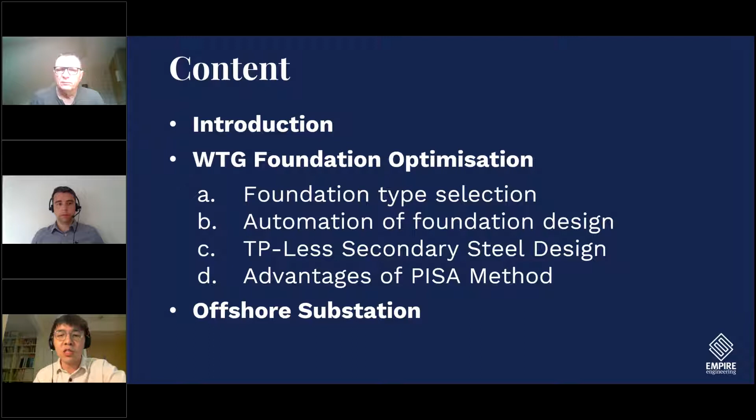And at the end of the presentation, we'll talk a little about our experience in offshore substation design. So a brief introduction of who Empire are and what we do - these are our values. As Empire, we are a niche engineering consultancy. Our values are trusted, because we've all been working on major offshore wind farms around the world and we're all experienced. We're specialists because we each have our own personal field of study, and we're all specialists in this industry. Last but not least, we're all responsive, we're happy to help, and we all love engineering.

What we do spans the entire project life cycle, from feasibility study, concept design, FEED design, to life extension, to commissioning of the offshore wind farm. For example, we do a lot of concept designs around the world to help bidders win the bid, such as the ScotWind leasing round and the UK Crown Estate round 4. We do concept design for them to give them a boost in their bidding round.

We also do a lot of FEED design to help developers get from concept design to detailed design. We also do life extension jobs, helping current operating offshore wind farms extend their structural life. These are the three main categories of our service: project delivery, concept and FEED design, and specialized work.

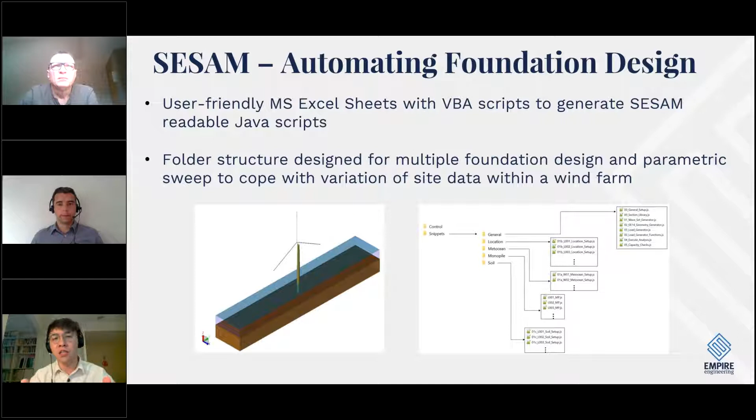We've also been using this in one of our studies, such as the Dogger Bank FEED study that we did only a couple of months ago. Now I'm passing the presentation to Andrew to talk about the Fathom automation part.

Thank you, Wei-Ting. Fathom is Empire Engineering's own in-house developed design analysis tool. It takes a set of input parameters regarding the wind farm site defined by the user, and generates the optimum foundation design from those input parameters.

Optimization is performed for the cost of the monopile, which can be based on our own internal cost database, drawing on our design knowledge and industry knowledge, or it can be a specific database tailored to the project.

Fathom allows Empire Engineering to deliver clients the most cost-effective design for their wind farm in a very short time frame. Currently Fathom designs monopiles, however we intend to expand this to jacket foundations as well, which will allow clients to compare which would be the most optimum design for their wind farm, whether that be a monopile or a jacket. Next slide, please, Wei-Ting.

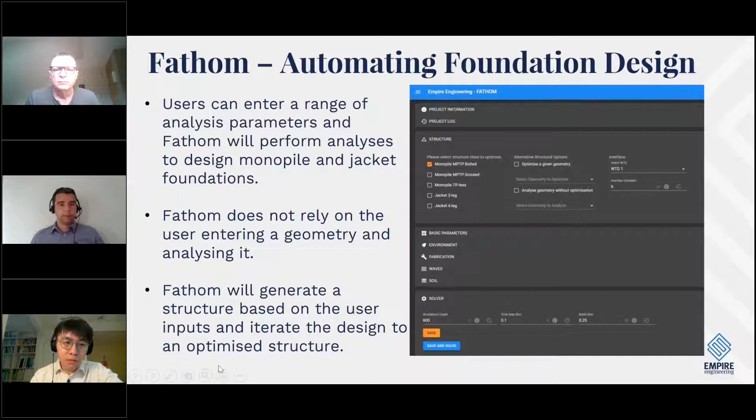Another aspect that we've been heavily involved in is the TP-less secondary steel design. It's a relatively new concept for the offshore wind market. It eliminates the traditional TP, and at Empire, we've really been involved in this from the concept stage right through to installation and commissioning.

The TP-less monopile reduces the operational cost of the wind farm, and studies we've undertaken show this could be a saving of between 6 and 10%, so it really is quite significant. The saving is mainly achieved by the elimination of a bolted flange from the traditional design, which is a costly offshore maintenance item that goes on for the life of the project, so eliminating it really is a benefit.

Savings can also be achieved during installation, as vessel owners can optimize their usage of their fleet, so different components can be installed by small and large vessels, which will compress the installation program. The reduction of operational costs is good during the lifetime of the project, but they will also make life extension more economically viable, potentially allowing you to extend the wind farm's life beyond the initial design life. So you can really squeeze all the usage out of your wind farm.

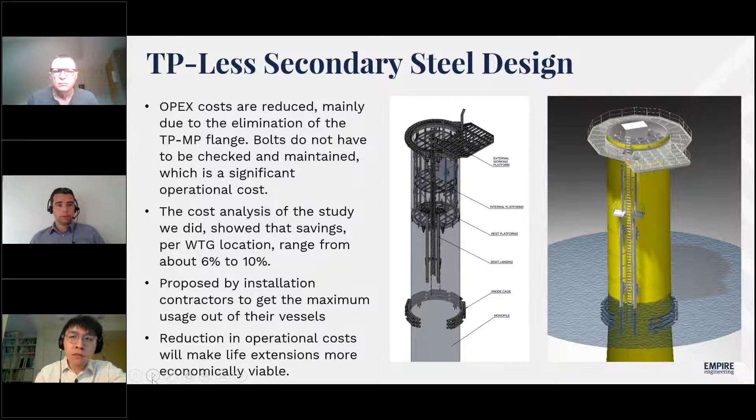At Empire, we've also been using the PISA method. The PISA method is a relatively new analysis method. The project was started in 2013, but it wasn't made available to the public until 2020. It aims to optimize monopile foundations by taking advantage of additional soil resistance, which wasn't captured in the traditional API methods. At Empire Engineering, we have delivered projects to clients, taking advantage of the optimizations PISA can bring.

These have really helped us reduce the cost of the monopile and reduce the embedment length, which can speed up installation as well. We have the experience in-house to design foundations using the PISA method, and this approach will be crucial in future to delivering optimized designs.

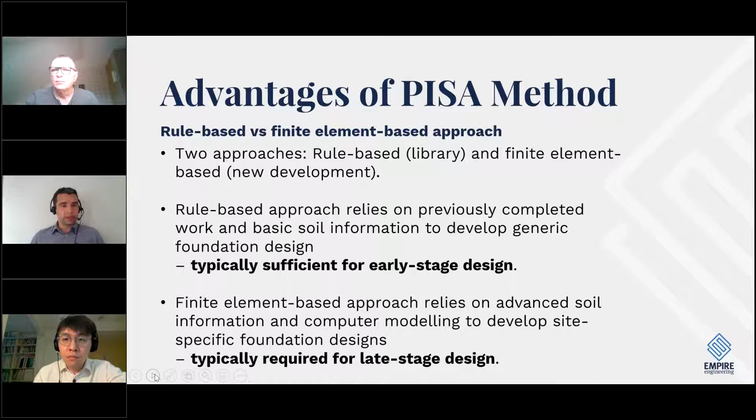At Empire Engineering, we not only deliver turbine foundations to clients, we have a wide breadth of experience designing offshore substations as well.

We conducted the full design of the structure, including the jacket and the topsides. We performed an optimization of the deck and all structural members to give the client the most feasibly optimized design. At Empire, although we've done a lot of concept designs, our team also bring a lot of experience from previous projects to Empire Engineering, so we do have a lot of experience in this area as well.

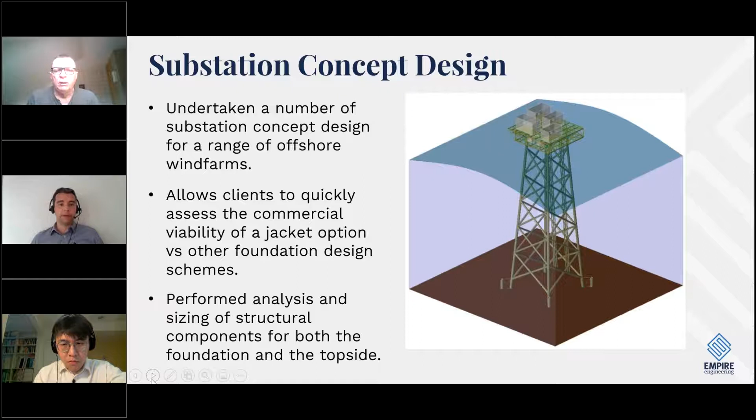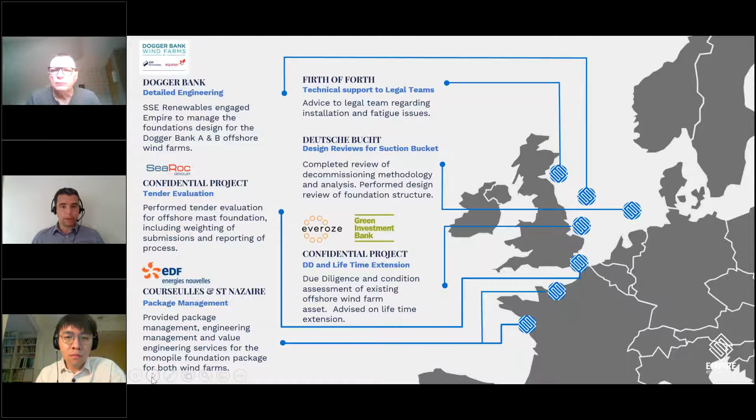So we've talked about our experience, but where have we actually worked? Let me give you a brief overview. Currently we are working on the Dogger Bank farm. Multiple members of the team are heavily involved in this, and we are working across all 3 Dogger Bank sites. We've also done work for various clients off the coast of France and also in Germany.

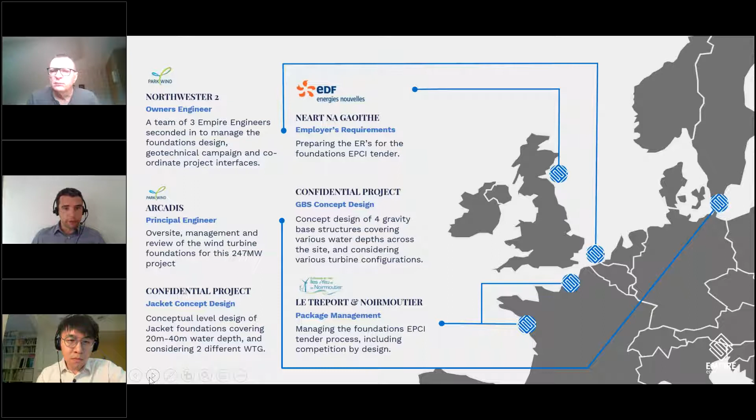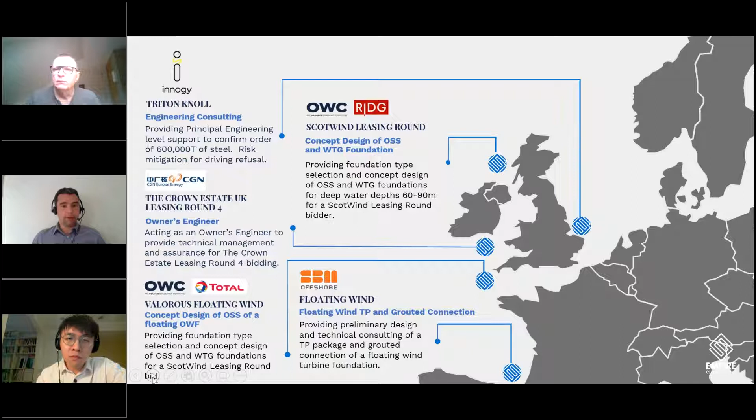The one to pick out here is that we've done the Crown Estate leasing round 4, which was right at the beginning of the project. We also have experience in floating wind - we were involved in a floating wind farm off the coast of France, just at the bottom there.

Our experience isn't only in Europe, we've also done quite a lot of work in the Eastern markets. We've done a couple of wind farm concept designs for Japan, Korea, and Taiwan as well.

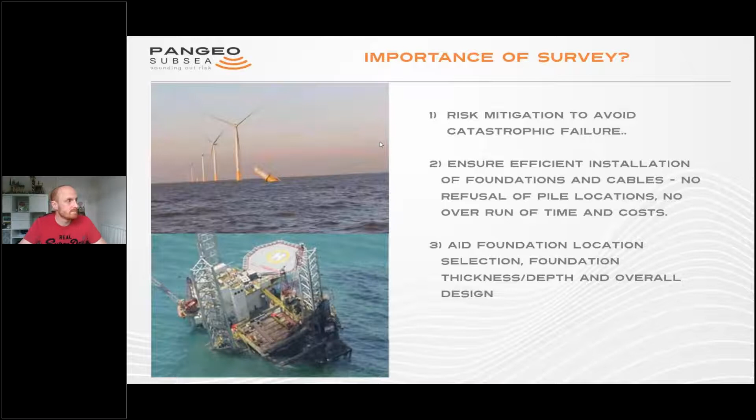Secondly, it helps in the overall design of those foundations - not only, for monopiles, the thickness of those walls in case you encounter buried boulders, but also what depth you need to target. I won't dwell on this, as there are people who know much more than me. Breaking the various foundation methods into two categories: fixed bottom structures, your jackets or monopiles, where survey design needs to account for the fact that they go much deeper into the seabed. Then the shallower foundations, typically your floating wind farms where it's an anchor - there your survey penetration only needs to be 5-10 meters, you'll have much higher resolution data, and you might be looking at a larger spatial survey.

Pangeo Subsea is a service delivery company. We specialize in subseabed 3D acoustic imaging technology, and we've developed two technologies to support offshore wind farm development.

The first one is the acoustic corer, shown at the top. Both technologies acquire 3D volumes below the seabed in high resolution. The acoustic corer is a tripod-mounted system placed onto the seabed, acquiring a 12-meter wide footprint.

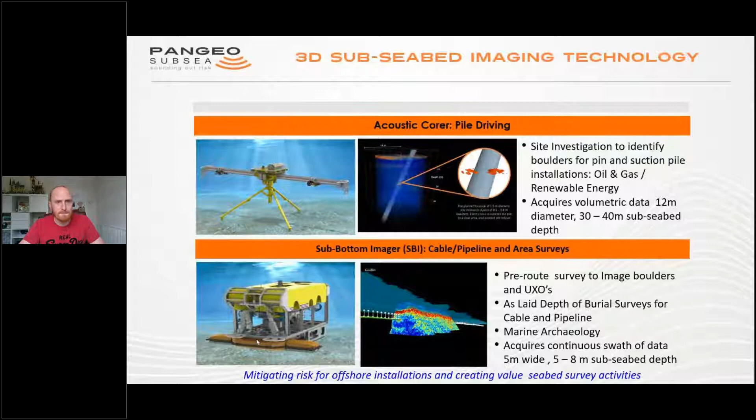Just a bit more about the sub-bottom imager, the first technology I'll run through with you. It produces a continuous high-resolution 3D acoustic volume below the seabed. It is a true 3D volume, although here I've got a few 2D slices to show you, looking into the volume.

Clearly this is a cable survey. We're going along the track here; this is your seabed, and that's where your cable is. This is what we call the plan view — we've sliced through the seabed to find the top of the cable.

It's exactly the same when you're looking for boulders or lithological boundaries — you slice through the dataset looking at these three different views. Then there's the side-on profile: here's the seabed, and this is the cable you can see, so you're looking side-on there.

Sub-seabed resolution is to 5 centimeters, 5-ish meters depth, up to 6-7 meters in some locations. What it's mapping is the acoustic impedance — when you go from sand to clay, there's an impedance at that boundary. It's exactly the same if you're hitting a buried cable or a buried boulder; it's the difference in impedance that it's detecting.

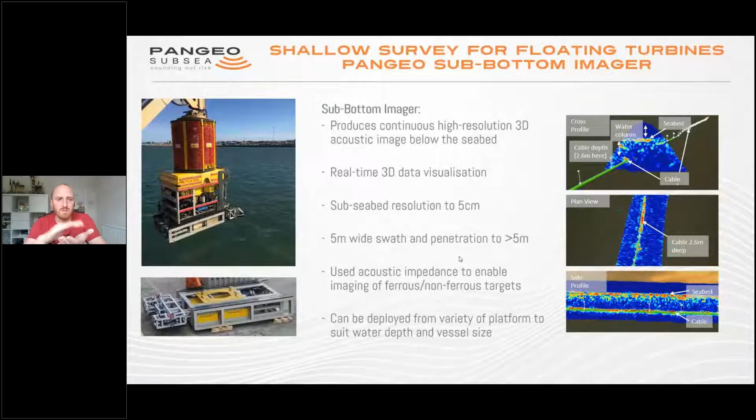Just quickly looking at the survey methodology, depending on the foundation design — here we're looking at shallow penetration of only 5-6 meters, for anchored foundations in this instance.

For these, you'd employ two different survey methodologies. One is if you already know those anchor locations and you're relatively certain you want the 3 or 4 anchors located in these spots — then it's a very small, targeted survey.

Typically the surveys we've carried out to date, targeting those locations, are about a 20 by 20 meter box, or a 20 meter diameter circle.

There you would acquire a 3-meter line space with the sub-bottom imager across the entire survey location, with obviously diminishing lengths of survey lines.

Here, the most efficient method of acquisition is from a work-class ROV, shown here with the sub-bottom imager in its ROV skid. There we build up a 200% overlap of the subsea data to ultimately enable detection of any buried anomalies and lithological boundaries.

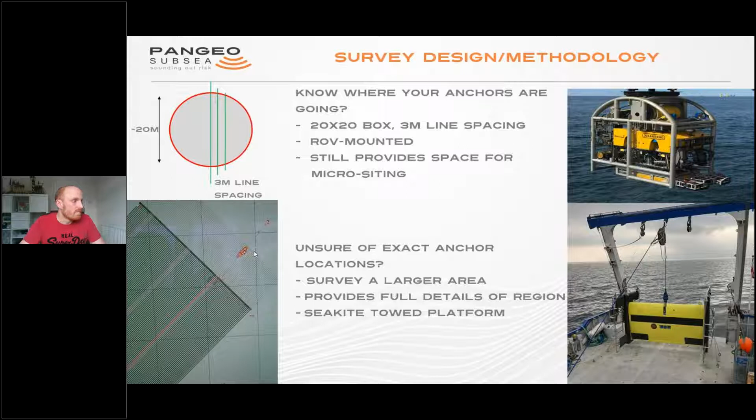So you're still delivering that 3D volume and able to locate all those anomalies and lithological boundaries, but in this instance you're acquiring over a larger area to enable more targeted foundation selection criteria.

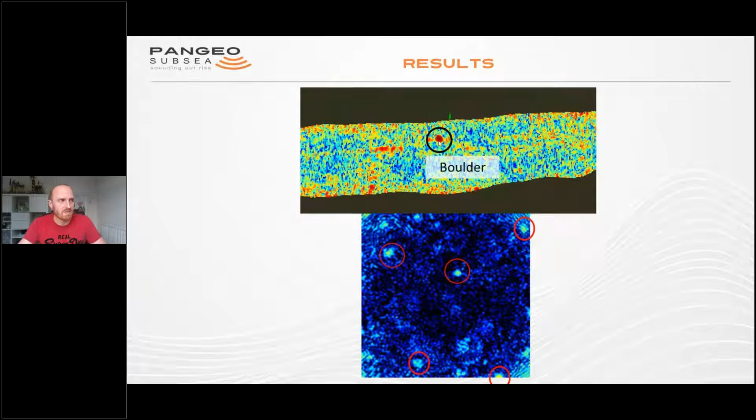The results from that survey, looking at individual survey lines now. These are top down, sliced into the seabed. As you're slicing through, you can see on the individual survey lines here until we locate the boulders. Here aren't numerous boulders on this line, thankfully only one. Ultimately, we're mapping its XYZ position so you know exactly where that boulder is, and getting very high resolution dimensions at 5 centimeter resolution. That's the technology.

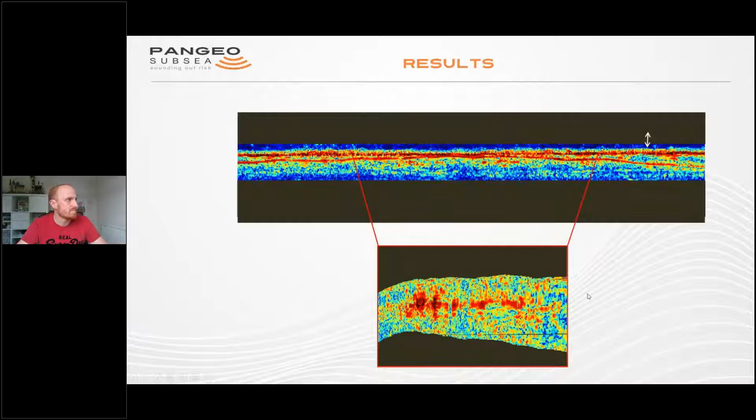When you start to stitch those survey lines together - till now we've only looked at individual survey lines, that 5 meter footprint - now when we start to overlap those survey lines and look at the broader picture of your 20 by 20 meter box or your entire survey area, you then get to start to build up a very clear picture of exactly what's going on below the seabed at your foundation site.

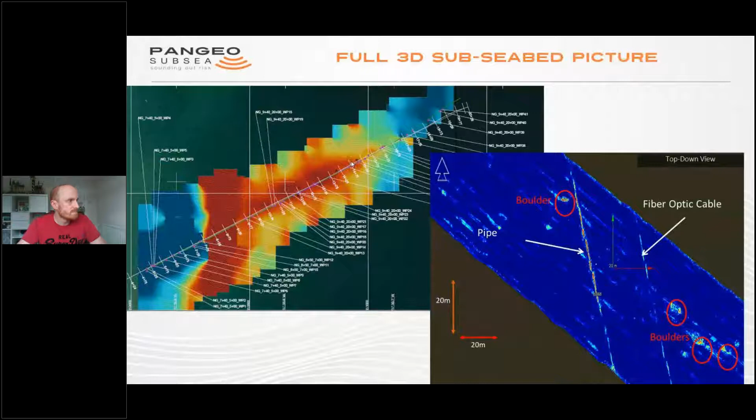Secondly, introducing you to our acoustic corer. This is used for your deeper foundations, so your monopile or jacket pin pile locations, when you need to acquire this high resolution data but to much greater depth. The acoustic corer produces a 12 meter wide diameter cube of data that penetrates anywhere from 30, 40 to about 60 meters into the seabed. We've done numerous projects within the Baltic, including one in the Polish Baltic where we achieved upwards of 60 meters penetration.

It houses two payloads, two acoustic payloads - a low and a high frequency. The sub-bottom imager is all high frequency. The acoustic corer now houses a high frequency, the exact same high frequency chirp projectors that the sub-bottom imager has, but also then has a lower frequency projector package to image much deeper into the seabed.

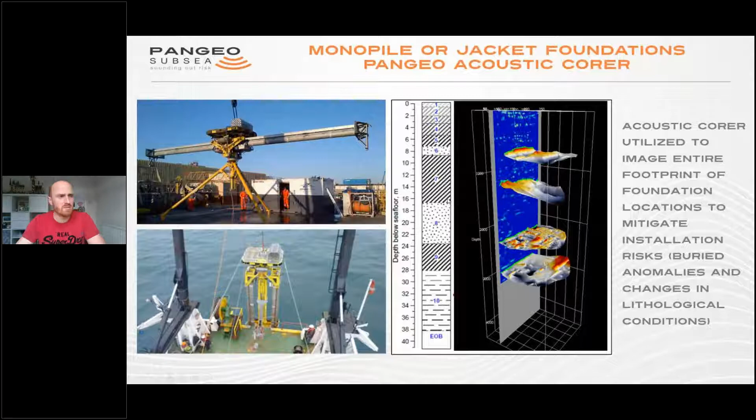Survey methodology is very simple or straightforward for a monopile. You've got a single location for that foundation. You would place the acoustic corer centered on the center of the pile location and acquire that data. If you locate any anomalies within that which you can't really pile through, the results are all given offshore within 24 hours, so you can start to daisy chain those to overlap until you find the suitable location.

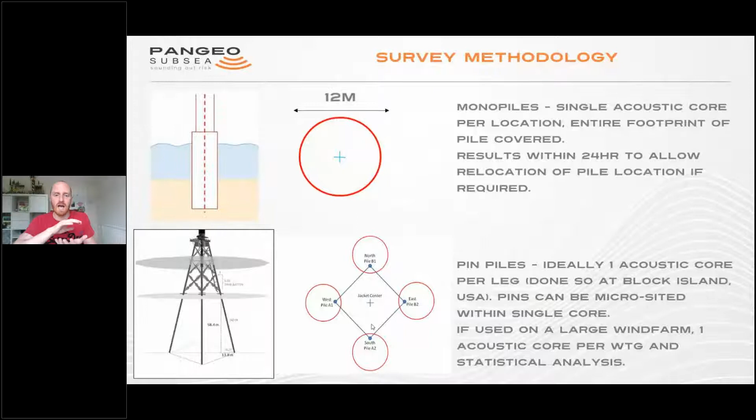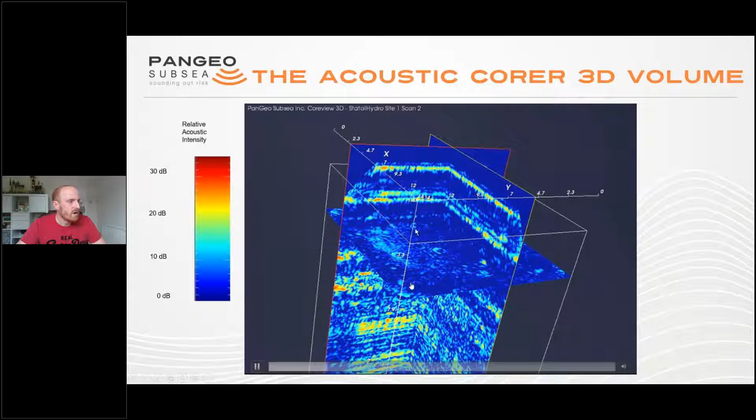I'll just quickly show you the actual results that we achieve here. So this is the 3D volume now, and obviously we can start to play about with it. Here we're pulling down through the data, but you can see here, so this is the seabed. These are different lithological packages here that we're encountering. And as we start to pull through, you'll then start to see the boulders mapped within that core.

Now, from the high frequency data that we achieve, about a 15-meter penetration. From that high frequency data, really we can see within reason pretty much any boulder that's within there, 10, 20 centimeter diameter, to 15 meters.

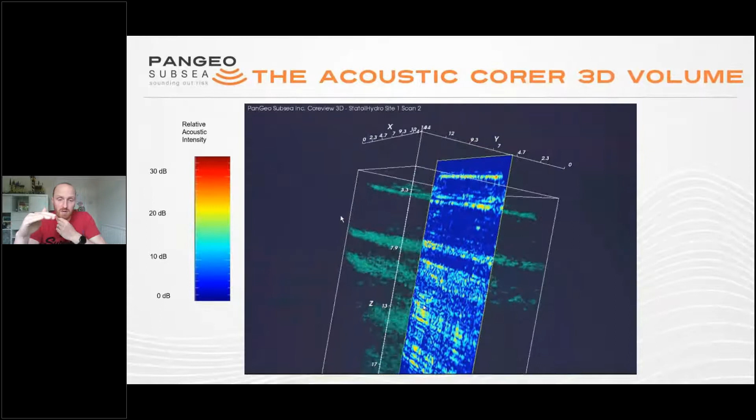When we switch over to the low frequency projector, obviously we start to look at that from 0 meters depth as well, just so we get that correlation between the 2 data sets. But it really comes into its own when the high frequency data drops out at about 15 meters. So then we're relying on the low frequency from 15 meters to maximum penetration, 40, 50, 60 meters. There, the resolution of that data does diminish with depth, but it's mainly its ability to differentiate 2 boulders that are close together rather than isolated boulders.

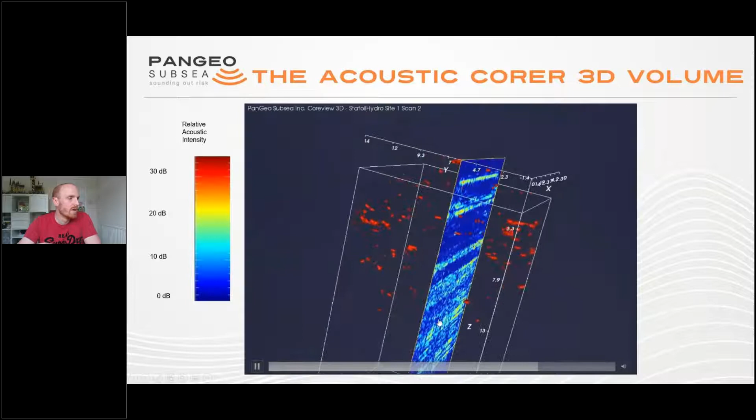So you're starting at 30 centimeter diameter boulder, and here you can just see it's mapped now, auto-mapped all boulders within that core to the entire depth. So 30 centimeters diameter at 15 meters depth, and then obviously it does increase then with depth as you get to the base of the core.

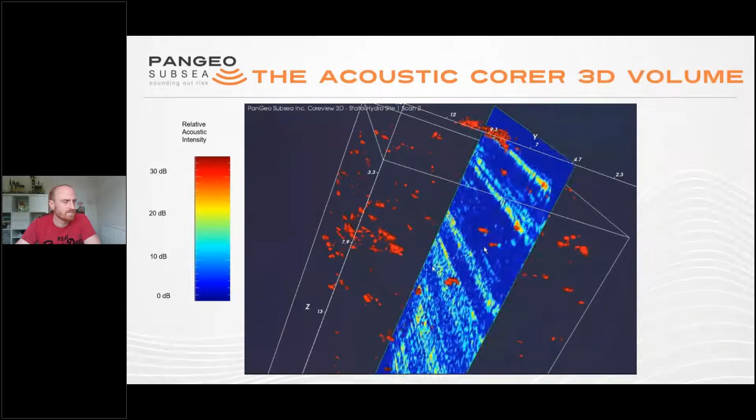The results of which, well, clearly it's an anomaly map for all anomalies located within the footprint of your pile, to the entire depth. As I said at the introduction of the acoustic corer, then you can start to integrate your geotechnical results with the acoustic results. So when you start to see the horizons within the acoustics, you can then start to extrapolate those geotechnical properties.

from that singular point of your CPT or borehole across the footprint of your pile location. So obviously with a 10-meter wide monopile, what you have at one location within that pile might not necessarily have the same geotechnical properties when you move away if a horizon dips out, but the acoustic corer enables you to extrapolate that data throughout.

This is an example of the pin piles at Block Island. There, obviously, we were able to locate some buried boulders which would have impacted the installation. So the client simply just micro-sited that. They just picked a slightly different location within that corer to move their piles to.

And then some spatial maps here just showing you the distribution of a monopile. So here in blue is the footprint of the monopile, in red is the footprint of the acoustic corer, and then just the ability to obviously locate all those anomalies within that. So ultimately, if you know there's a lot of anomalies within that monopile location that you can't necessarily move, it'll just help you then ultimately design that monopile slightly, or the piling pressures that you're going to put on, to obviously make sure that you don't get any refusals at that site.

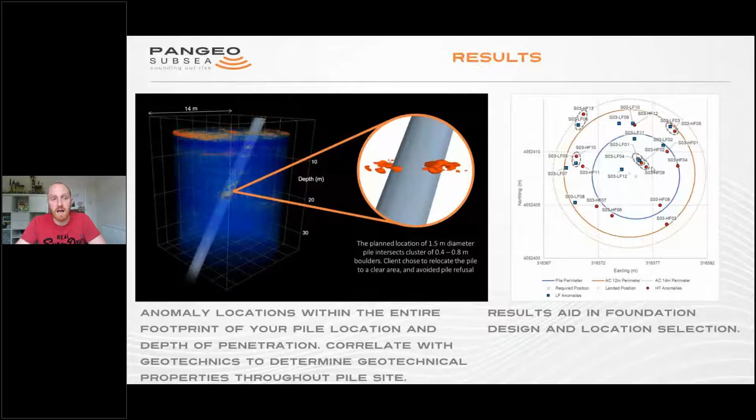That's all I had. Thanks very much for listening. I'd love any questions you might have.

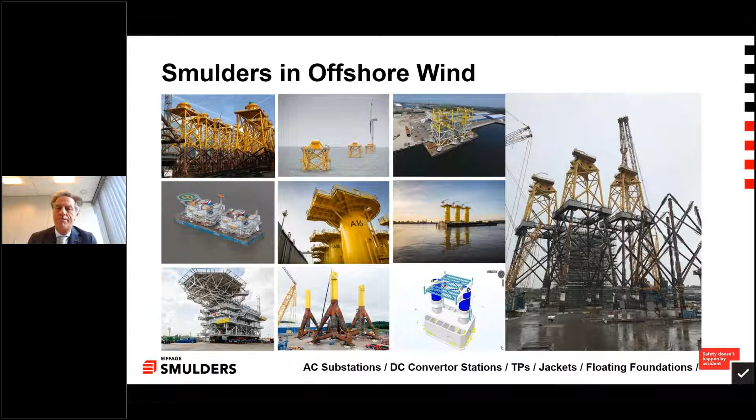Today, I'd like to discuss with you a few tips and tricks, a few knowledgeable facts on design foundation, and then specifically for serial production.

I started my career in oil and gas, and I worked for more than 20 years for several oil and gas fabricating yards, some of the largest in the world. My last project was a production facility, more than 125,000 tons. So I came to Smulders in 2014, and at that time the transition pieces were weighing 300 tons. So I said to myself, Eric, this cannot be very complicated.

The only difference is that oil and gas fabrication structures are usually a one-off, almost every time, whilst offshore foundations for offshore wind are produced in series, and quite larger series. The largest series Smulders produced up to date was the Gemini project, 160 units. It will be taken over by Dogger Bank, where at this moment we are going to do 180, and probably another 87 to follow. So serial production is really a very, very different style of production than one-off production.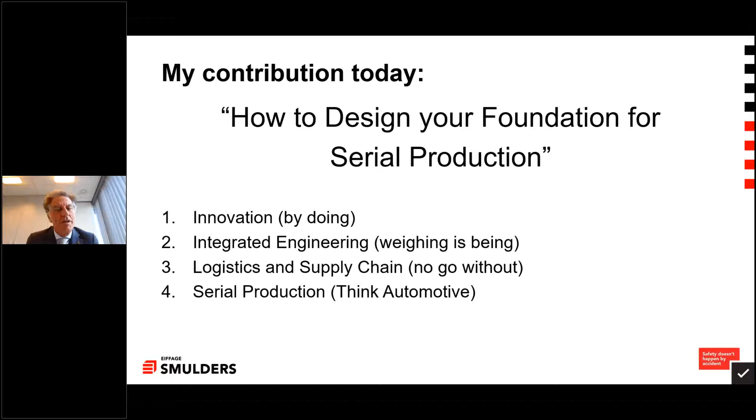Four focus points I'd like to discuss with you: innovation, of course. You cannot talk about offshore wind without talking about innovation, but what does it mean for serial production? Integrated engineering, logistics, and think automotive - the mindset you need for serial production.

Innovation, as I said, innovation is the buzzword. If you don't innovate, they think you have no role in offshore wind. Well, ladies and gentlemen, I can tell you, since 2001, Smulders has performed more than 40 offshore wind projects, and I can tell you they were all different. There was no project that was similar to the previous one.

Lessons learned, of course, remain important, but if you only steer on your previous experience and don't innovate, it will not work. On the other hand, equally important, offshore wind industry, in my opinion, is a rather conservative industry. Progress happens, but step by step. We don't take large leaps, especially not the big European utilities. But every project is different than the other, and innovation, of course, plays a very important role.

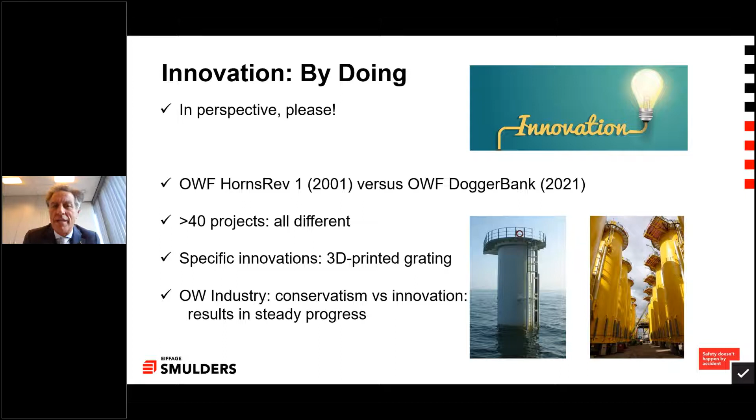Integrated engineering - I call it a balancing act. We have seen great designs, innovative designs. Later we saw that they were a bit too innovative, as they were very difficult to fabricate, and then later on impossible to install. So what I want to say here to the designers - I touched upon this subject at Fabrication X in 2019 in Bristol with the guys from Empire Engineering - you should look to all aspects of the product chain, the fabrication chain, when you design your offshore wind foundation.

Weight, for example. Some developers focus on weight. Then I always ask the question, what is the most expensive? Is it a hole in the plate, or a whole plate? We see some designs where weight is saved by providing a hole in the plate, but what do you think is most cost efficient - to leave the plate as it is, or to make a hole in the plate? The whole plate or a hole in the plate? This is something you have to weigh as a designer.

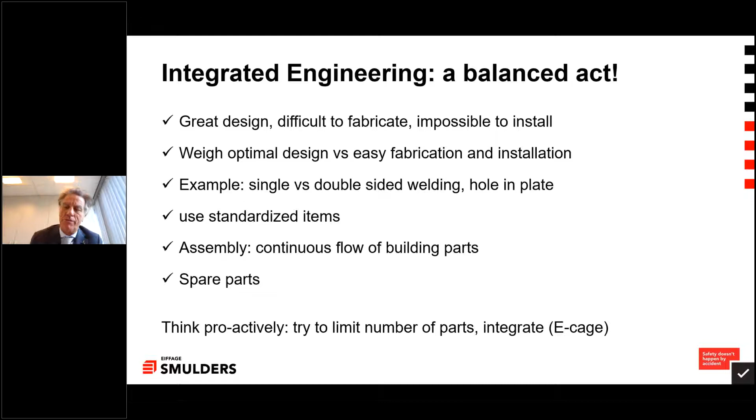A third item I'd like to bring to your attention is the importance of logistics. And I think that logistics, supply chain management, is one of the major differences between serial production and one-off production. I can speak from experience - I was project manager for a large fabrication platform for oil and gas, and also for one of the first substations for the German offshore wind market. We never saw so much importance in a good working logistics plan and a good working supply chain.

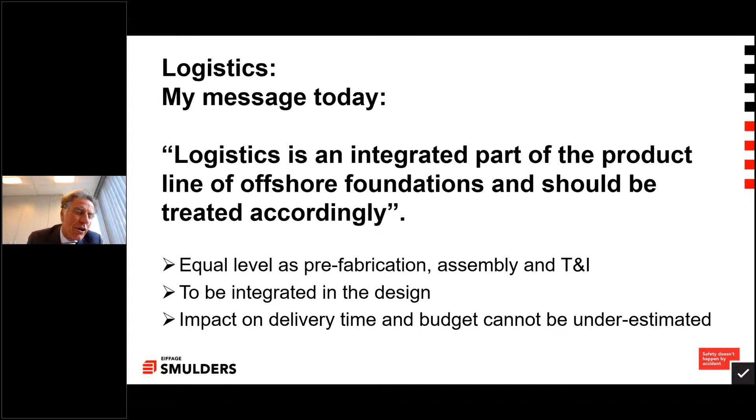If you order something, you need to order it 80 times. If you have 80 foundations or 50, the company you are ordering with must be able to deliver that day by day in the correct format without damages. We have to be aware that if one of these 7,650 items is not there, you simply cannot deliver the foundation. So as you can see on the screen, the delivery time and budget importance of stalling logistics cannot be underestimated.

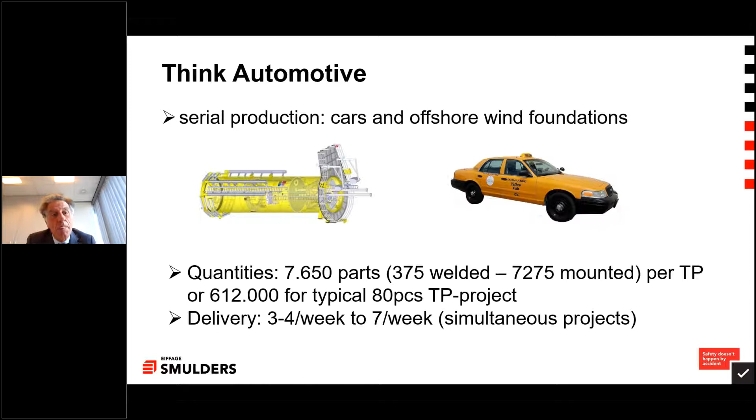And then last but not least, the mindset you need as a serial fabricator. It's basically the same as when you are a car manufacturer. I even think that people who used to work in European car manufacturers can be good colleagues of offshore wind foundation fabricators. They have this knowledge of serial production, and they can be an asset to the company.

A few practical tips to designers, but also to developers. First of all, and this is really important, especially nowadays with the shortage of all kinds of materials, metals, chips on the world market, avoid using exotic materials. It makes no sense to use high tensile steel for offshore wind foundations, because for loads and fatigue, Z quality or E quality brings no added value. On the contrary, these materials are very, very difficult to get, especially now, but in the required series.

Also, as I already explained, we can have a standardized product, but if it needs to come from the other end of the world, where transport and handling are a risky business, it doesn't help the serial fabrication, and it puts a risk on the on-time delivery of your product.

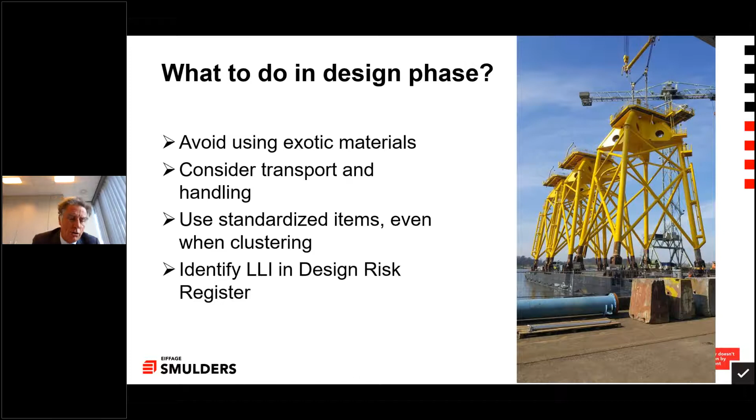Then the fabrication phase itself, also here serial production requires some different thinking. I talked about automotive thinking, car manufacturing. Well, there you have the big choice between your in-house manufacturing and subcontracting of parts. LLI candidates are long lead items, meaning an item which you need to order very well in advance because of long delivery times.

Coming back to supply chain management. Supply chain management is something else than buying goods. We are talking about long-term relationships. Smulders has a number of suppliers, of course, but most of them were with us since the very start of our activities in offshore wind.

Not all suppliers see that from the first glance. So our purchasing department, our supply chain department, is speaking every day with the suppliers and explaining them what specific needs we have as a serial producer of offshore wind foundations.

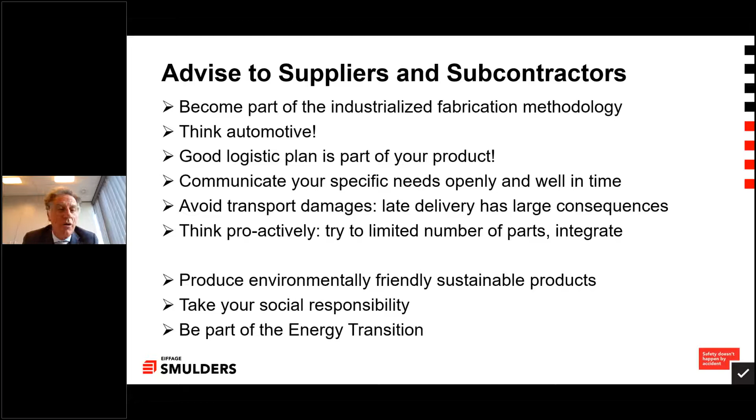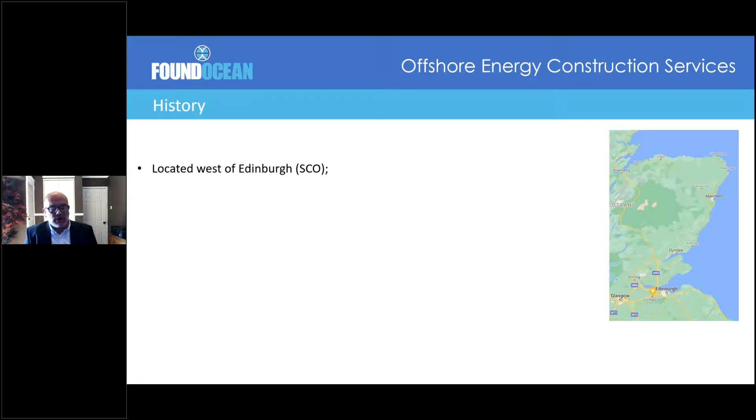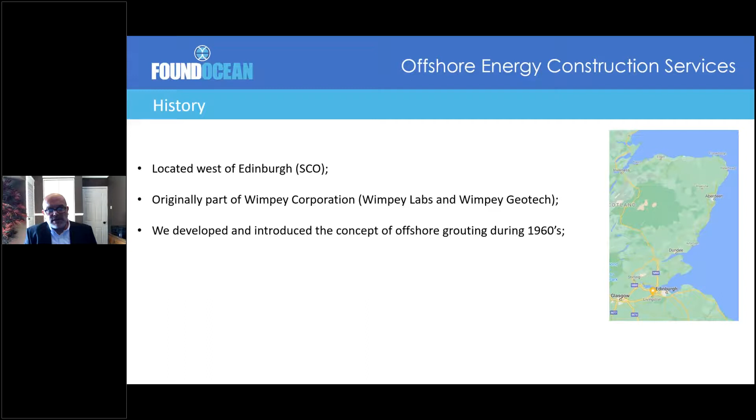Our main office is just west of Edinburgh in Scotland. We're originally part of the Wimpey Corporation back in the early 1960s, but towards the early 90s we split out from Wimpey Labs and Wimpey Geotech to form Seamark Systems. The Wimpey Corporation developed and introduced the concept of offshore grouting during the 1960s, where in the Persian Gulf we grouted our first offshore platform on the Zakum oil field. Excluding Arklow Bank, which we grouted in 2003 for Densit at the time, our first solo offshore wind farm was in 2010, which was the Ormonde offshore wind farm in the UK, which was at the time the largest single installation of jackets - 31, 32 jackets on that wind farm.

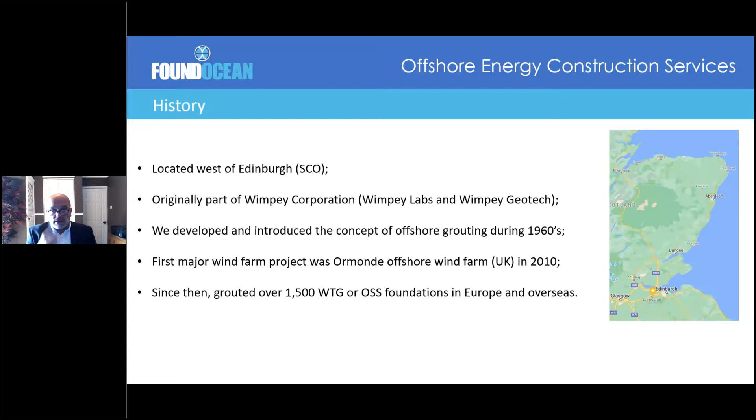Since that time, we've grouted over 1,500 wind turbine generator foundations and offshore substation foundations in Europe and overseas. We're currently working off the northeast coast of the UK, just offshore Scotland, on 2 projects, and we're in Taiwan as well working on a project, as well as our other offshore oil and gas projects around the world.

So what do we do? Primarily, we provide grouting services for foundations, for the fixed bottom foundations in offshore wind and oil and gas and tidal. We also provide inspection, repair and maintenance of offshore assets, as well as solutions for strengthening, modification, repair and the decommissioning of offshore assets as well.

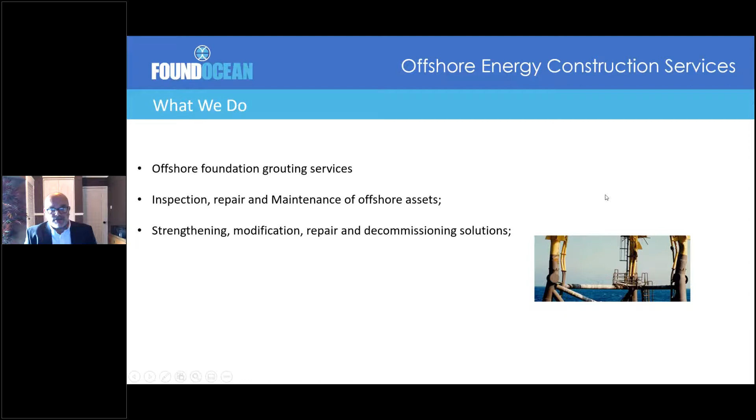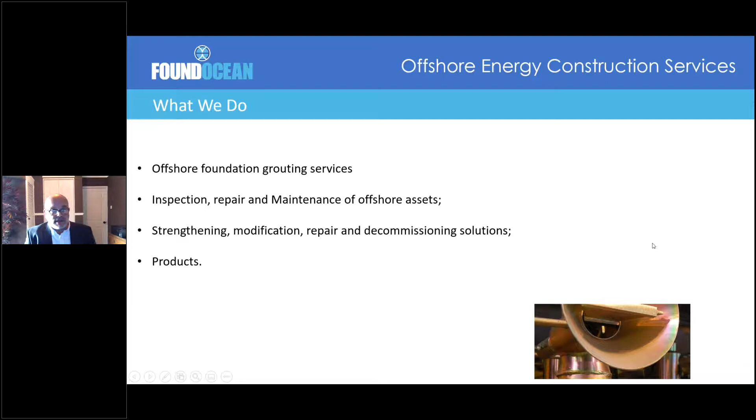We also have a range of products, primarily fabric formworks for offshore wind. That could be for pipe and cable protection, or for support of J-tubes exiting monopiles. In other sectors, it's typically to correct free spans or to protect pipelines or cables. The image here is of our ROV connector range, which has become pretty much standard offshore.

So for offshore grouting, we'll talk a little bit about our experience and then finish off with a short case study on the Beatrice wind farm, which we grouted back in 2017.

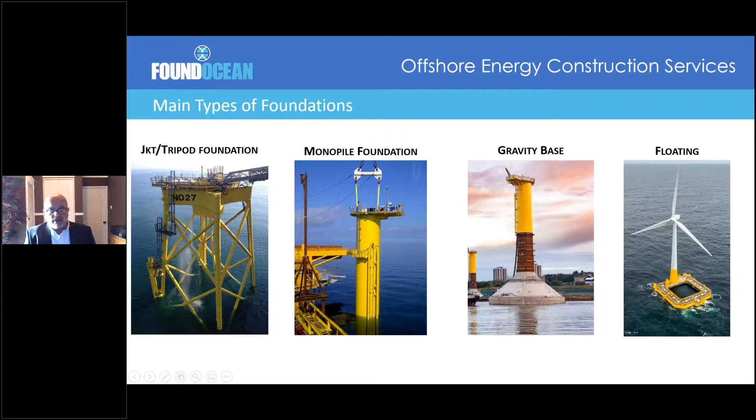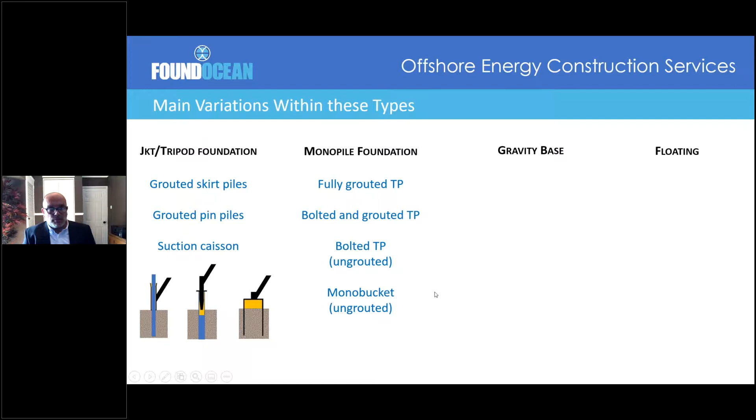On the monopile, there is the fully grouted TP, the bolted and grouted TP, the bolted TP which is ungrouted, and the mono bucket ungrouted TP, which is a monoblock solution. Gravity-based units are typically ungrouted. In oil and gas, you would find a level of under-base grouting to assure even load distribution, but typically in offshore wind farms, a lot of ground preparation goes ahead before the gravity-based foundation is placed. And then floating - there's no grouting, or we've not seen any grouting up to this point.

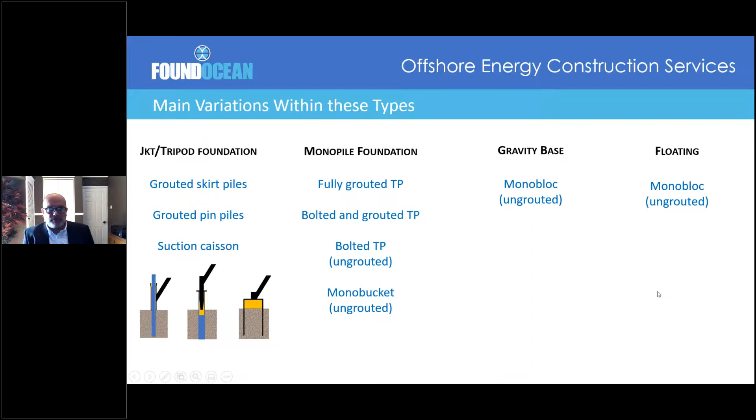So when we talk about grouting - when I first joined FoundOcean, I thought grouting was limited to what you did with tiling in the bathroom. But grouting is essentially the mixing of cementitious products for the fixing or repairing of offshore foundations.

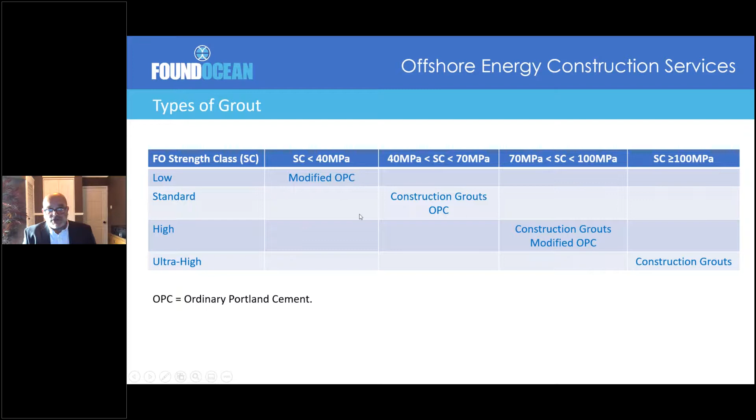At FoundOcean, we typically have four classes, which we split into low, standard, high, and ultra high. Low strength grouts are typically used for suction caisson grouting or for under-base grouting of gravity-based structures. Standard would be a jacket pin pile, as in Ormonde or Thornton Bank, or more often than not for member infill on repairs. High strength grouts are typically designed for the range of 70 MPa to 100 MPa, referring to the 28-day strength of the cube when crushed. Ultra high strength grout is anything above the 100 MPa mark. OPC, which I talk about here, is just an acronym for ordinary Portland cement.

So, common offshore construction grouts - this is just a few of the ones that we see a lot of, and there are more coming in. There are plenty of material developers out there looking to certify their grouts for offshore wind use. But typically at the moment, construction grouts fall into three categories: standard, high, and ultra high. That's the Ducorit S2, the MasterFlow range, the Sika grouts, and the ShifuGrouts, which are Taiwanese grout.

If we talk about the type of grout to the type of foundation - for a jacket or tripod with grouted skirt piles, we would see a high strength grout, around the Ducorit S8, the Masterflow 9800, or the Sika 3620, which the Sika grout 3620 is the old brand name, that was the Parex 100 Newton grout.

If the designers specify the grouted connection to be stronger than 100 MPa, we would see the likes of Ducorit S5R or Masterflow 9500, the ShifuGrout U799, or the Sika grout 3500. For grouted pin piles, as I touched on earlier, Ducorit S2 or OPC have all been used in the past, and also the Ducorit S8, the 9800, and the 3620.

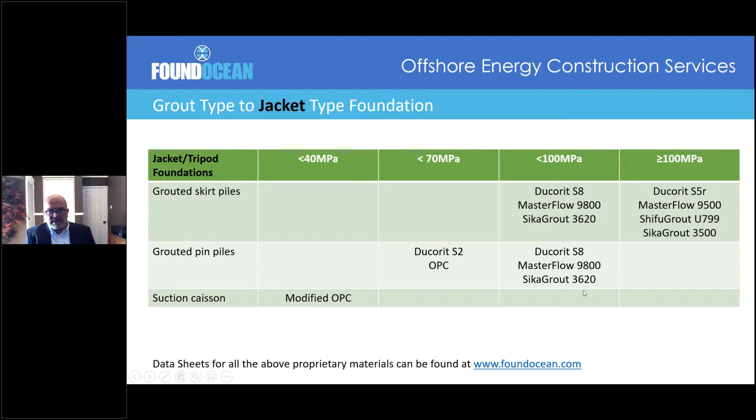For suction caisson type jacket or tripod foundations, you would have a modified OPC. Essentially, a modified OPC for suction caisson is a strength class of anywhere between 1 to 5 MPa, so it doesn't really set like a cementitious grout we would expect. It forms more like a clay, which is then easily removed at decommissioning. All of the data sheets for these products can be found on our website, along with other case studies as well.

For monopile foundations, fully grouted structural grouted TP, we would expect to see the Ducorit S5r, the 9500, or the ShifuGrout, or the Sika grout 3500. All of these are ultra high strength grouts.

For the bolted and grouted TP, you would see Masterflow 9600, and we're seeing increasing interest in the use of OPC, particularly where the grouted connection is subsea, so drying shrinkage doesn't really become an issue because OPC is not compensated in any way - it's just a neat ordinary Portland cement mixed with seawater, so it does suffer from slight drying shrinkage at the leading edge of the grout phase. The bolted TP has no grouting at all, and the monobucket has no grouting, although there is potentially an opportunity for low strength grout with the underbase grouting.

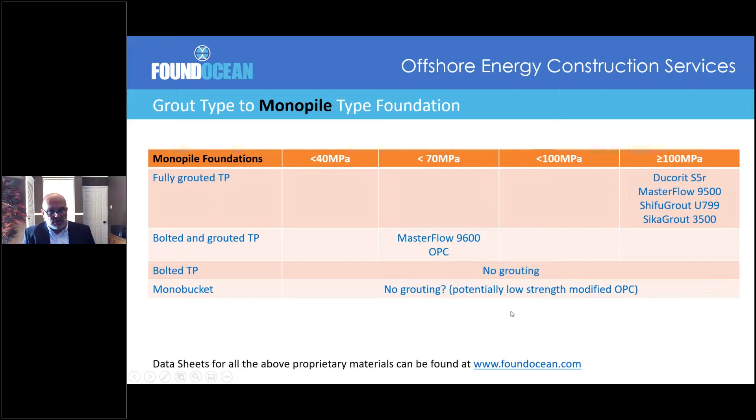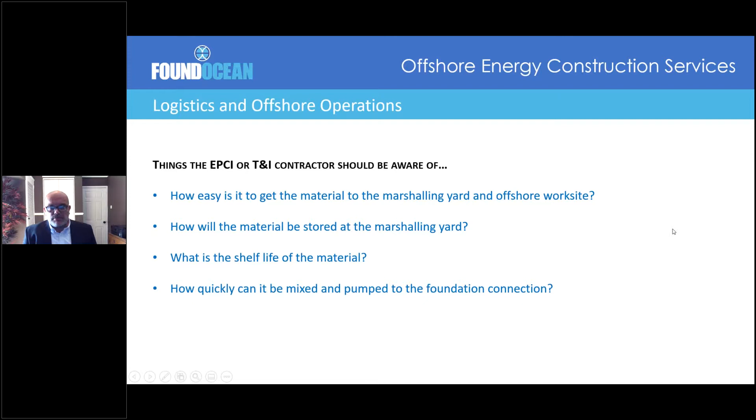So from our perspective, the things that the EPCI or T&I contractor should be aware of for the logistics and offshore operations of grouting: How easy is it to get the material to the marshalling yard and the offshore work site? How will the material be stored at the marshalling yard? What is the shelf life of the material? How quickly can it be mixed and pumped to the foundation connection? Does the material need a DNV type approval certificate or just track record? And what are the implications of one material type over another?

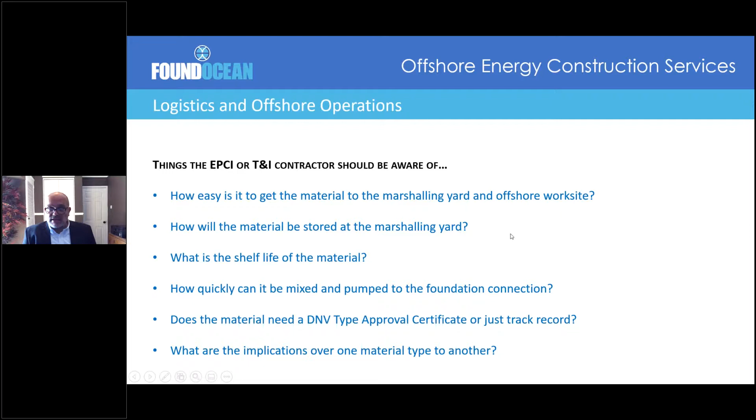These are all questions that we're asked at the beginning of a tender process, and we're asked our opinion on. As I say, these are just our opinion. They're not in any way the typical opinion of other companies.

So if I take each one of those points: how easy is it getting the material to the marshalling yard and the offshore work site? For European projects, the supply to the marshalling yard is fairly straightforward. Most of the proprietary construction grouts are manufactured in either Denmark, Germany, or Belgium, and OPC is manufactured in most, if not all, European countries. They're delivered in bulk or big bags - much of that, all of that type of grout.

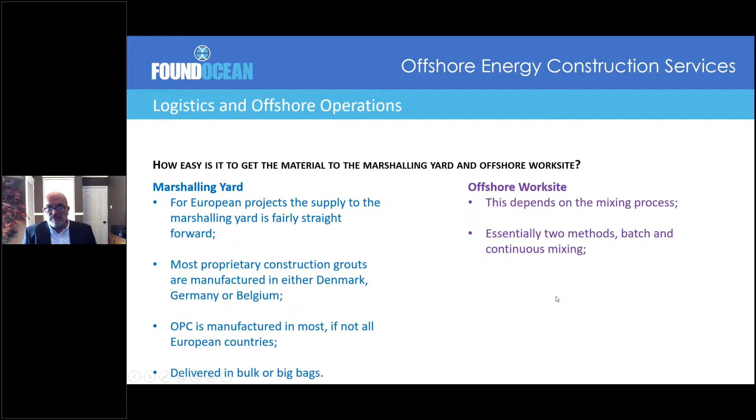For the offshore work site, this depends on the mixing process that's going to be used. Essentially there are two methods: batch and continuous mixing. Batch mixing, the material is predominantly delivered in big bags, and continuous mixing, the material is delivered in silo. I say predominantly big bags because there are instances where you could have an auger-fed system delivering a certain weight or mass into a mixing pan, which takes the big bag concept away and uses silos. But predominantly any batch mixing process is typically done with big bags.

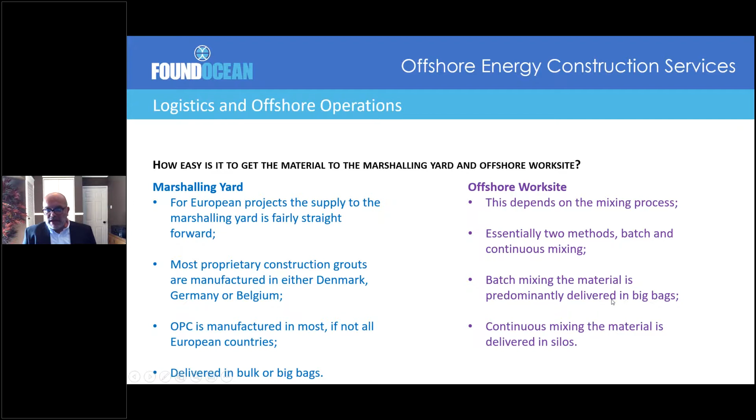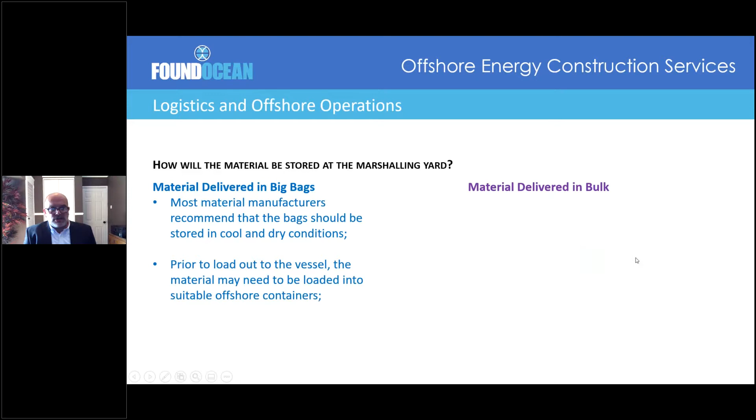How will the material be stored at the marshalling yard? Most material manufacturers recommend that the bag should be stored in a cool and dry condition. Prior to load out to the vessel, the material may need to be loaded into suitable offshore containers. The offshore containers are loaded onto the vessel during resupply.

Material delivered in bulk is typically pneumatically transferred from the road bulk tanker to waiting offshore or dedicated onshore silos. During the vessel's resupply, the silos are either exchanged with the empty silos on the vessel, or the material is pneumatically transferred from the onshore silos to the empty vessel silos.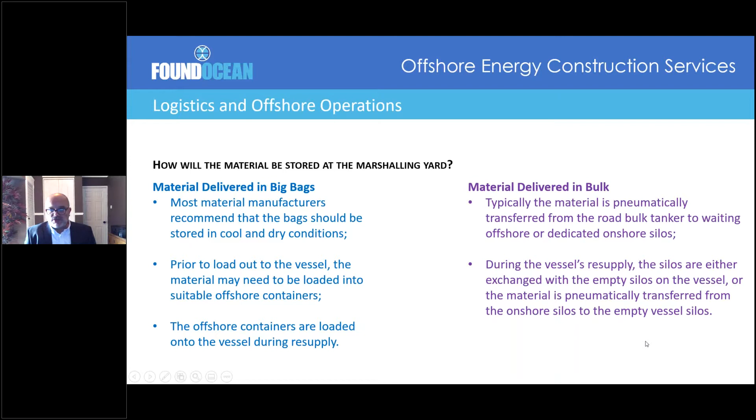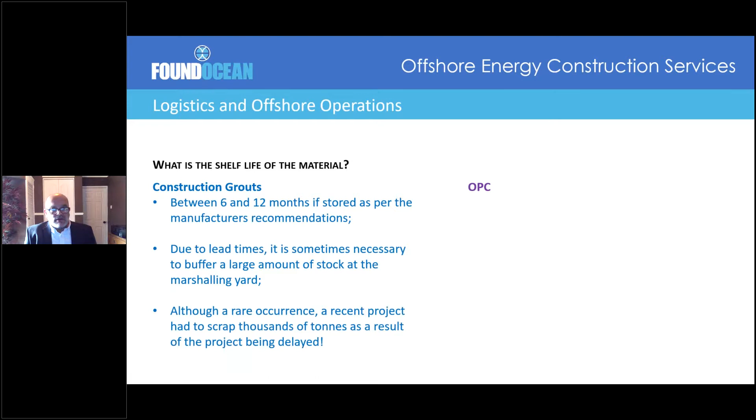What's the shelf life of the material? Well, pretty much 6 to 12 months. And there are, in many cases, very long lead times with construction grouts, which can lead to problems if projects do get delayed. OPC, again, typically 12 months, as long as it's stored correctly. As the delivery time for OPC is typically around 2 weeks, less material stock is required at the marshalling yard, particularly if the manufacturing site is close.

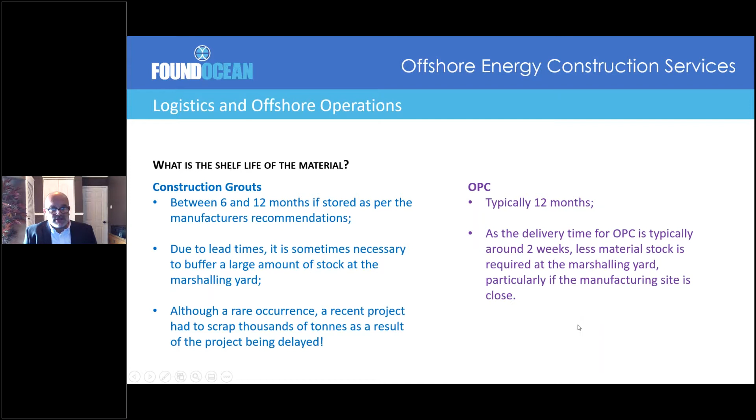How quickly can it be mixed and pumped to the foundation connection? This is important because you want to keep your operations to an absolute minimum on the critical path of the vessel. Material delivered in big bags can be anything from 6 cube an hour to 20 cube an hour with the pan mixer and super pan mixer, and variations of these things available on the market.

These are batch mixing equipment. Material delivered in bulk can range from 14 cube an hour to 45 cube an hour. Now this is construction grouts - this isn't OPC. If we were talking about OPC here, we would be nearer probably 70 to 80 cube an hour, and certainly 30 cube an hour with a recirculating jet mixer.

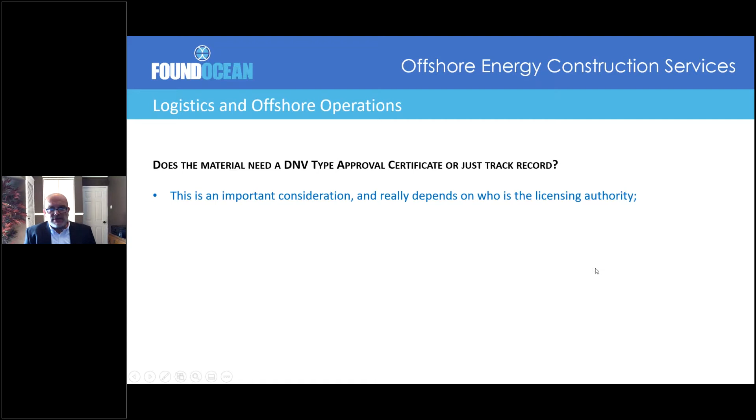So does the material need a DNV type approval certificate or just track record? This is an important consideration and really depends on who the licensing authority is. In Germany, although DNV certified materials are preferred, track record on previous projects offshore Germany is also being given consideration by the BSH.

What is important to say is that allowing the use of non-DNV certified materials certainly opens up the choice and lowers the overall costs. By way of an example, to our knowledge there's been no issue on Ormonde offshore wind farm, Thornton Bank 2 and 3 offshore wind farms, and Borkum West, all of which were grouted with an ordinary Portland cement which was non-DNV certified, but that was back in 2010 to 2012, quite a few years ago now.

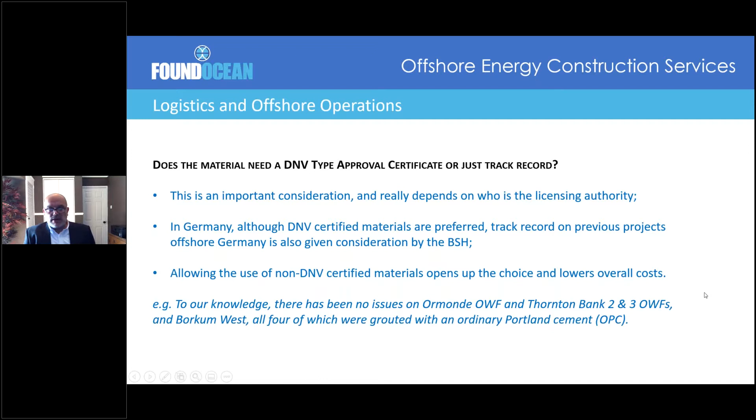What are the implications of one material type over another? So big bag materials require a crane to lift the bags into the mixer.

Construction grouts require fresh water, whereas OPC is mixed with seawater. This would mean for a 20 cube connection, as much as 7,000 litres of fresh water could be required for a construction grout, and this would need to be supplied from the vessel's main water supply or held in tanks on deck.

The mixing of the material and the delivery of the grout to the connection is typically faster with bulk supplied material.

Bulk supplied material is less prone to being affected by weather, i.e. crane operations, which may be limited in high winds.

And typically construction grouts are more expensive due to the lower yield and higher price per tonne than OPC.

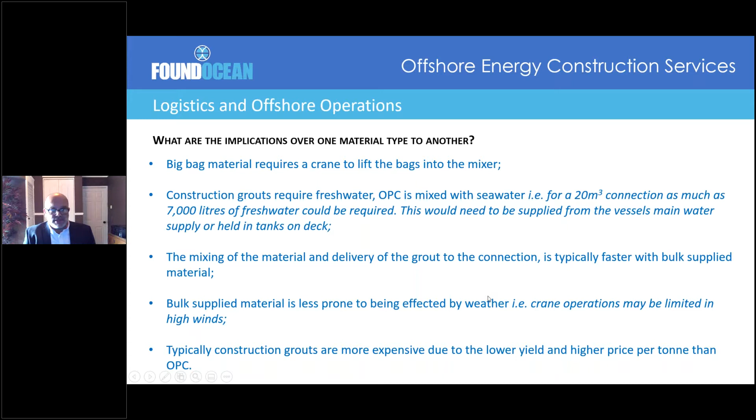So the last couple of slides, I would just like to talk about the Beatrice offshore wind farm. This was grouted by Foundocean with support from its partners back in 2018. The general overview was that it was a wind farm with green energy to power over 450,000 homes. It's located in the Moray Firth in the North Sea and was a joint venture between SSE, CIP and Red Rock Power Limited.

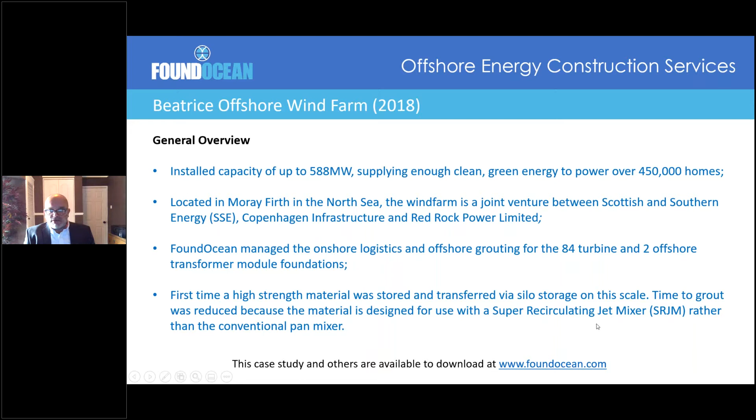Foundocean managed the onshore logistics and offshore grouting for the 84 turbines and 2 offshore transformer module foundations. It was the first time a high strength material was stored and transferred via silo storage on this scale. The time to grout was reduced because the material was designed for use with the super recirculating jet mixer rather than the conventional pan mixer.

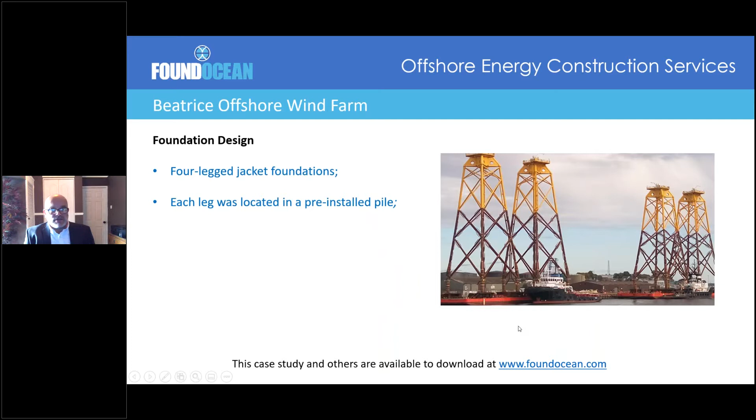The foundation design was a 4-leg foundation. Each leg was located in a pre-installed pile, and the grout lines ran through the jacket legs.

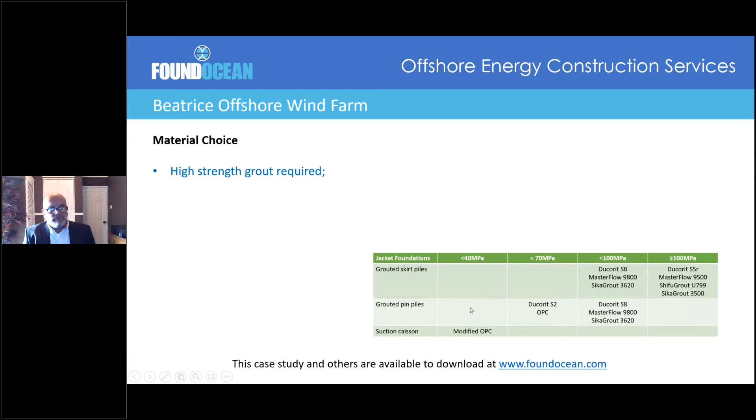The material choice, as I said, was very important. They needed a high-strength grout. Preference was for it to be bulk supplied to optimize deck space and continuously mixed to meet the project schedule. So MasterFlow 9800, which was the only material at the time, was chosen for the project.

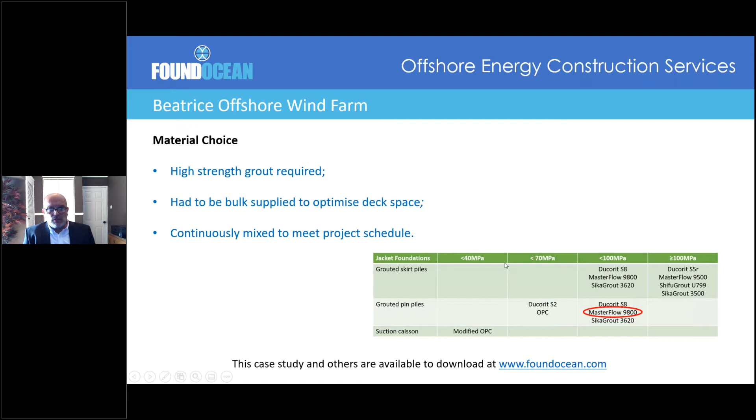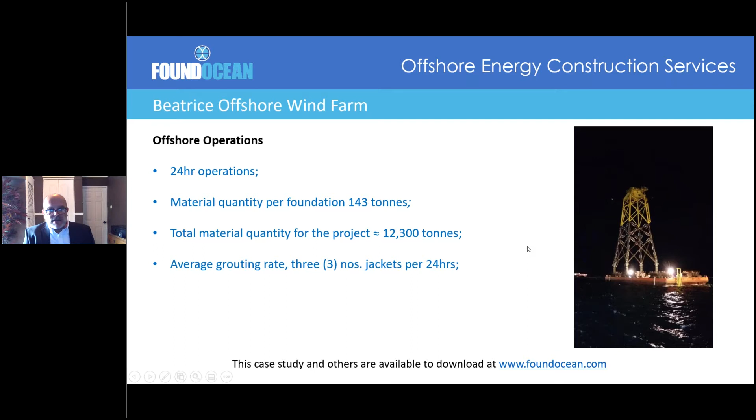Offshore operations, it was a 24-hour operation, and the material quantity per foundation was 143 tonnes, which made a total material quantity for the project of 12,300 tonnes. The average grouting rate was 3 jackets per 24 hours, and we took over 6,000 cubes for our QA procedures.

Onshore operations and logistics. Foundocean provided the quayside coordinator for single point contact. The material was shipped from Germany to Rotterdam. With our partners, we provided approximately 1,000 tonnes of onshore storage. This enabled the project to run smoothly and to take into account flexing of the schedule.

The material was pneumatically transferred to the resupply vessel during port calls in the vast majority of time. There were other instances where smaller silos were lifted and replaced with on-deck silos, but the vast proportion of the material was pneumatically transferred.

And we provided material tracking using our batch track system, which is an important part of using construction grouts that are DNV certified, as you need to be able to show an audit trail from point of manufacture right through to the connection on the foundation.